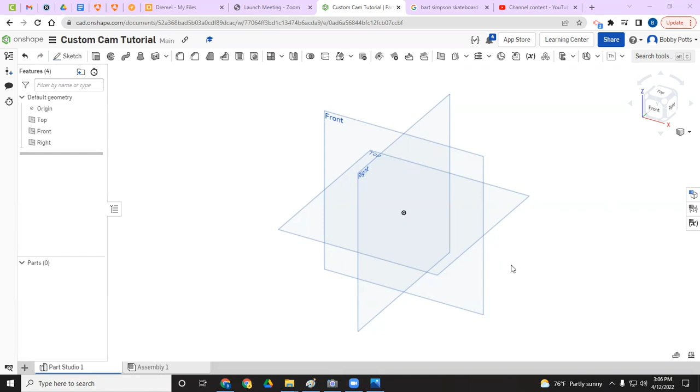Okay, guys. So today we're going to take our polar grids that we made, creating a cam, and we're going to make a cam on OnShape using that polar grid. So I've taken a picture of one of your guys' work, and what we're going to do is we're going to recreate this on OnShape with this general shape.

I highlighted it just so I could see it a little better, darkened a center point so I know where the axle hole goes. But we're going to take this and create this cam. So what you need to do is take a screenshot, hugging as close as you can to that. All right, just your snip tool, save that image, and we're going to open it in OnShape.

But looking at it, each one of these lines is 0.25 inches. So starting from my center, that would be 1, 2, 3, 4, 5, 6, 7, 8 lines. 8 times 0.25 would be 2. So here we have a radius of 2, and in this direction, we're not quite to 2,

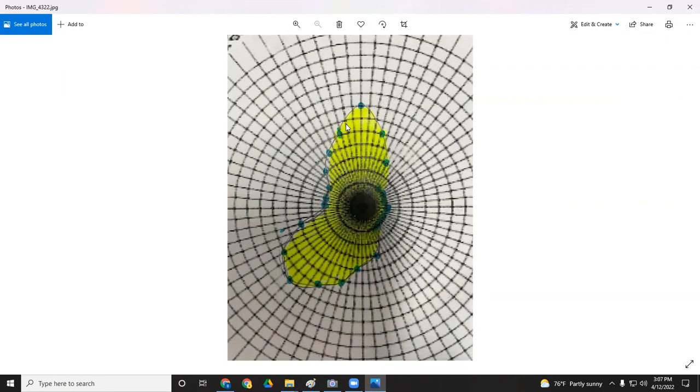but I'm going to build a 2x2 box or 4x4 because if we're 2 in this direction, the box is going to represent the diameter. So I'm going to build a 4x4 box, and I'm going to paste that inside of it. So sketch, I'm going to do it on the top so that it lays flat. And all I'm going to do first is use the center point rectangle, start in the center, make a box. I'm going to make it 4x4.

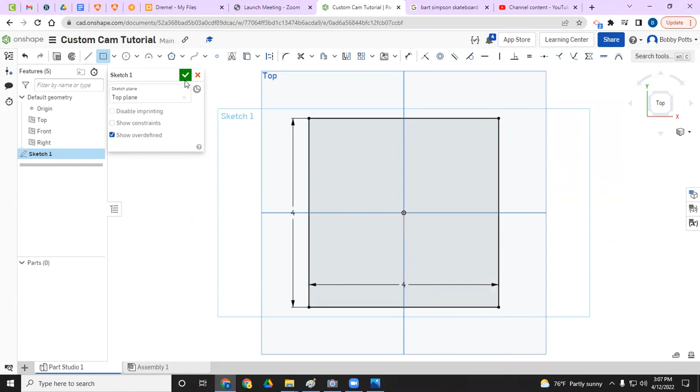Now this is just giving us a boundary of our cam. We know our cams can't be any bigger than 4 inches by 4 inches. They won't fit in our boxes that we've made. So I'm done with that sketch, and all it is is setting up an outline. So now I'm going to create a second sketch, do it on top of that face, and I'm going to insert an image. So down here, import. If you don't see import on your screen, hit the full screen button.

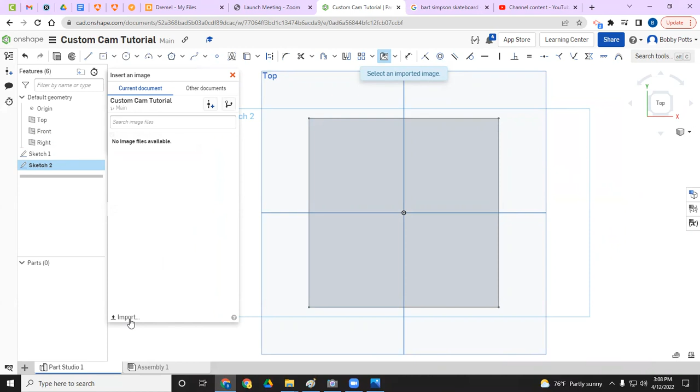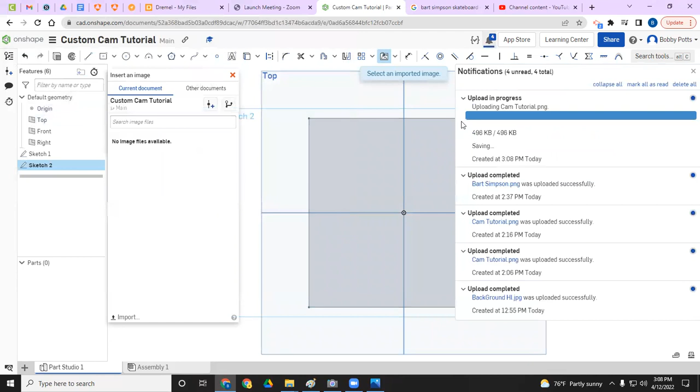So in my downloads, I believe the cam tutorial photo is what I saved it as. Uploads. So we're done with that. So I'm going to click cam tutorial, and I'm just going to start in this corner. That's why we hugged it close, so I can extend it, and I'm going to go until the top of that cam is on that box. So that's pretty close. We're a little less than 4x4, but we're going to roll with that.

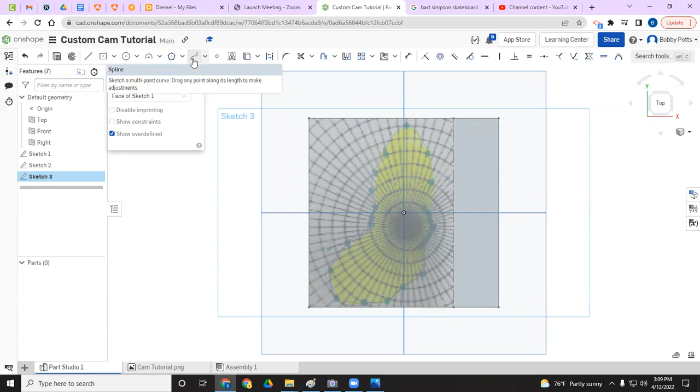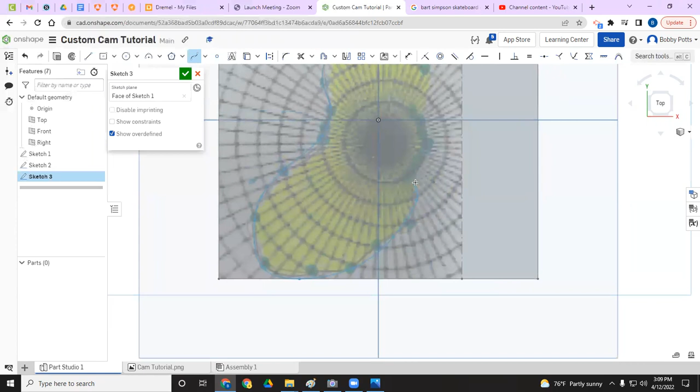Finish that sketch. So now I'm going to do a third sketch on that same face. And now what I'm going to do is take my spline tool. All right, this little squiggly line with points. I'm going to click that, and I'm just going to go around just periodically hitting these points. Double click, it turned blue, so I've got a completed shape.

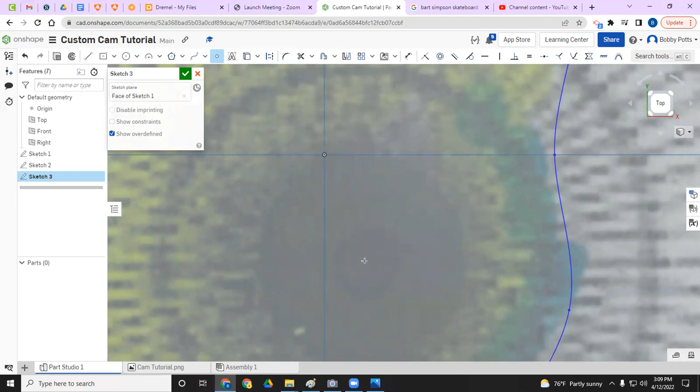All right, next thing I want to do, I'm going to place a dot right here. I've made a center point, so I'm just going to place a center dot there and do a center point circle. And we've decided our axle diameter needs to be 0.262. So when we 3D print them, they will fit on our axle rods. Okay, I finished that sketch.

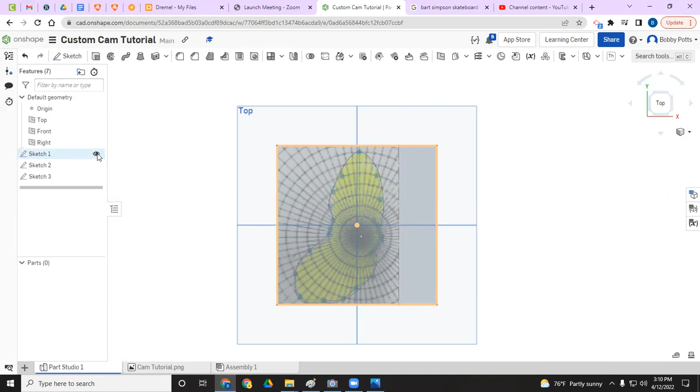But what I want to do now is I want to hide sketch 1. So come over here and click the eye. Sketch 2, I want to hide it as well. And now I'm just left with my cam. Now, if you want to smoothen that stuff up, I would probably move this out a little bit, move this one out. All right, just making my transitions a little bit smoother. Drag that point there, just some minor adjustments. That looks pretty good. Okay, so there's my cam.

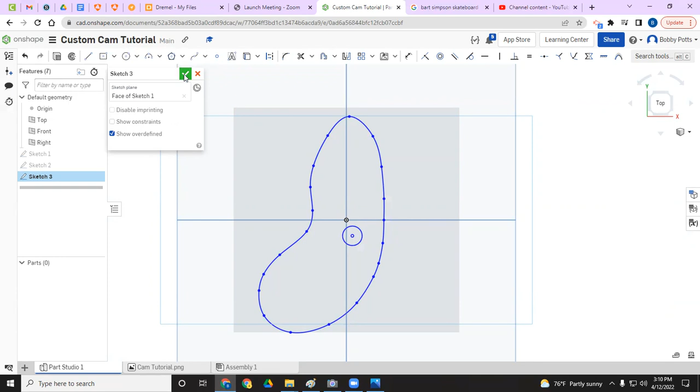Finish that, do a quick extrude. That's our face, and we want to do it at a depth of 0.125. So there is my cam.